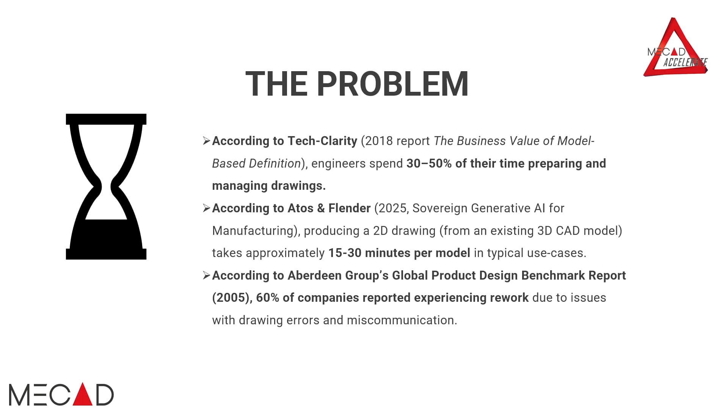Everyone spoke about drawings earlier. Someone referenced 50% of our time. Edith referenced 60% of our time spent on drawing creations. We actually went and did a little bit of study on this and found that 30 to 50% of our time is spent on drawing creations, with typically 15 to 30 minutes per model. That's a lot of time.

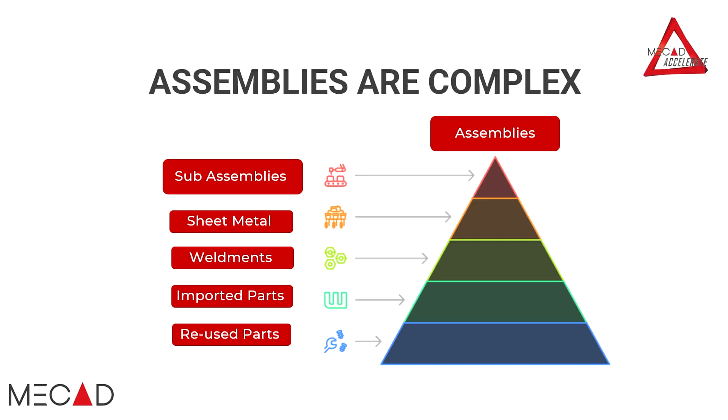And on top of that, 60% of that requires reworks because of miscommunication, of not giving through the information that is required by said drawings. Why is drawing so complicated? It's because of the complexity of assemblies. We have assemblies that have parts, sheet metal parts, weldments. It has imported items. It has item reuse. Certain parts in this subassembly are used here and there. When do I create that and what information do I put on the drawing? Very quickly it becomes complex in nature.

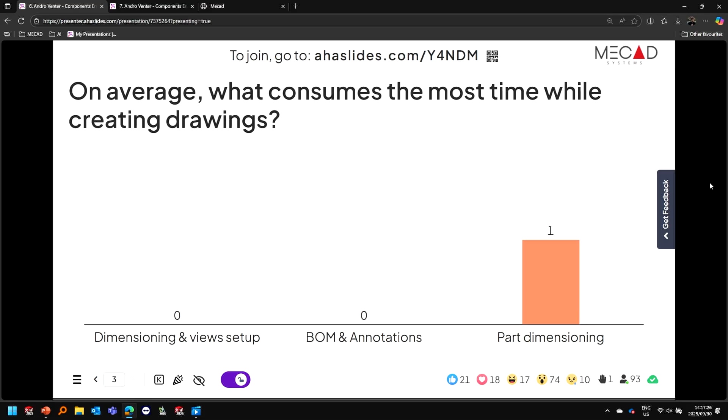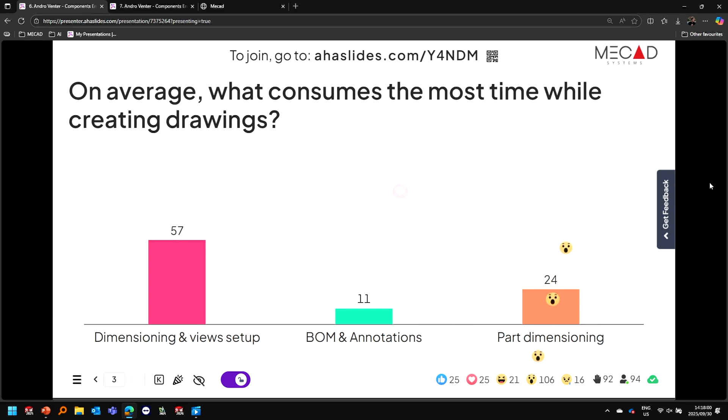Okay, so our next question. So what is taking the most of our time? This will be interesting because it's normally all three of them. This is very interesting information for me because I would guess that the 11 people are the ones that work with incredibly big assemblies that have the BOM information there. And who wants to be brave and say from those people, do they regularly look for that little bill of material balloon that is misplaced? That is typically where that goes into.

Typical sheet metal drawing. What does that involve? It involves your 4 standard views in bent format, and then additionally to that, your flat pattern information with your bend lines and your thickness that is related to that, with its bend annotations and its thickness.

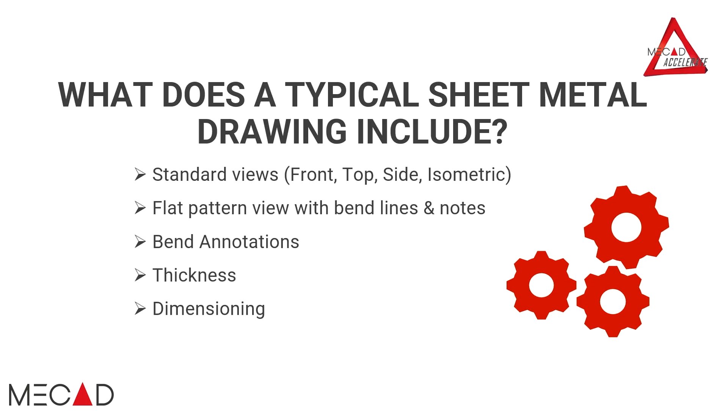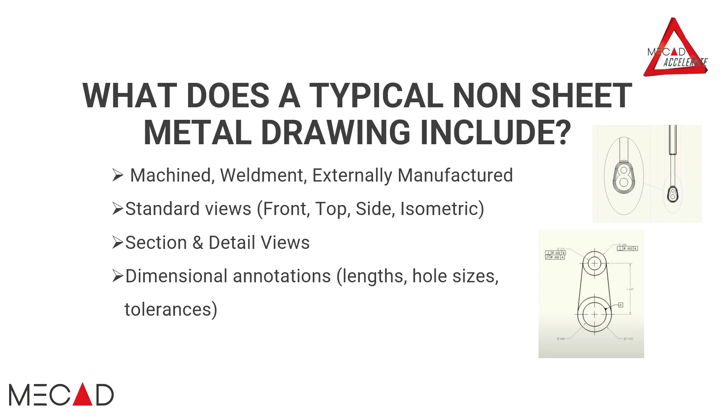Secondly, we have our non-sheet metal items that also have those same standard views with a front view, a top view, a side view, and an isometric view. But as we all know, it doesn't have a flat pattern because there's no flat pattern of non-sheet metal items. That is typically our weldments. It is imported parts. It is machined items in a subtractive fashion or an additive fashion, those that use those modeling practices. And finally, the annotations that we refer to.

So, what does a typical assembly drawing include? So, here we have again the same views. We have exploded views if they are applicable to us in whichever orientation it is that we're looking at. Bill of materials, I'll get back to that one shortly. And ballooning and annotation.

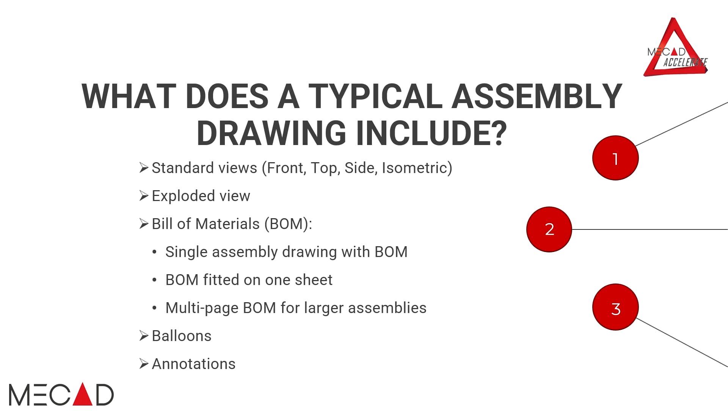We have 3 main bill of materials that we work with. So we have a very small assembly. That is one where all of the information can typically fit on one page. It is something with 5, 6, 7 components, and you just want to show that information. So that's category number 1. Category number 2 is the one where the bill of material becomes quite large, where it consumes the entire first page, and you start with your views on your second page.

And then on top of that, you can start with isometric views on your second page, and then thirdly, you can have your standard views on the next page. That's the second category. And then the third category is for extremely large assemblies, where your BOM can span 5-6 pages, and then only after that do you start with your views.

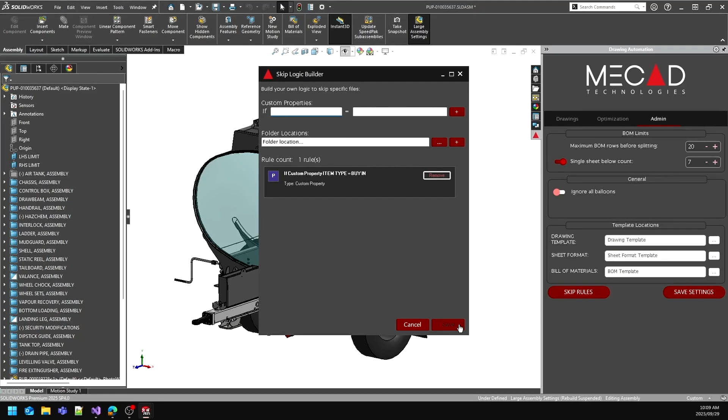The next one is the skip logic. So we spoke about the common items. It has skip logic on specific folders, as well as specific custom properties. So if you have a custom property called stock item for all your stock items that you don't want to generate drawings for, that is where this will be done, as well as specific folders where that folder is left out.

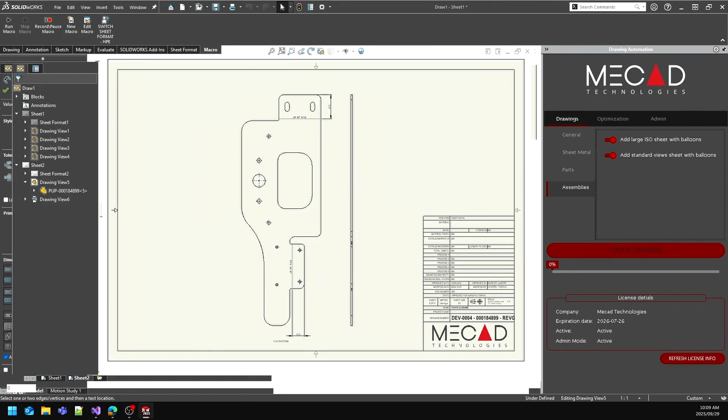Okay, next we're going to move into how it actually runs. So Wian can move over. It's going to say create. I'm going to give it a moment for everyone to just take in. So first it's going to start with sheet metal. After sheet metal, it will do weldments, auto scaling, fitting it to the sheet. If it has bend dimensions that are the same around a symmetrical axis, it actually puts in typical and removes all the unnecessary bending data.

Okay, so there we could see it runs through the weldment items. And by the way, this works with structural elements, as Edith previously said. Another question. Is a weldment profile and a structural element profile the same thing? First person to give me the correct answer. Yes. So for whoever has weldment profiles, the weldment profile is the same profile as you use in a structural element. We did some research on that to make sure that it is, and it works with the same APIs if you want to integrate that.

Okay, so next we're going to move on to our assemblies. I want you to pay attention to the right top hand corner just below the bill of materials. So we spoke about ballooning. What this does, it actually goes and calculates what balloons are not on this specific page that I have in front of me. So that is something that sits behind, or the views that I have on the page cannot typically pick that up.

We built in the intelligence that it goes, balloons everything on this page, then goes to the next page, then tries and balloons everything that it can find on view 1, then it goes to view 2, view 3, view 4, trying to get through all of the ballooning in that process. And in the end, it says to you, these 5 items I cannot get in the views that you have presented to me. Then, you know, section views, detail views, or hidden views, that is your next prerogative.

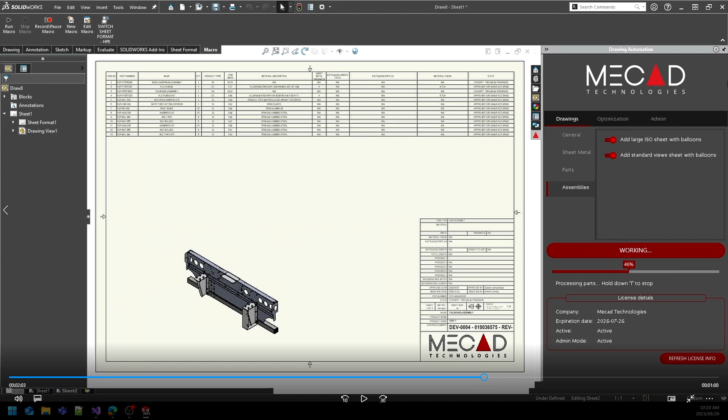Wian can start it for us. There you can see on the right top hand corner, all of those balloons aren't visible in here. There's a lot of parts, by the way, of this that's on the back hand side. If he runs it in the next views, you will see the balloons are in the next sheet. So there's a lot less balloons in the right top hand corner for the next views.

So the fortunate thing with this is it doesn't really require that you model in a specific way. But remember, as John Paulo said earlier, garbage in, garbage out. So if your model is extremely dirty, it's going to give that dirty information back to you. So the cleaner your model is, the better your modeling practices, just with the same modeling standard. It has no issue with using various ones.

So currently, we did not build in exploded views because that is specific to each company's unique needs. Some companies use a lot of exploded views. Can we build it in? Yes, and we can build it exactly how you want it to say, this is my exploded view position, I want it in isometric view, or I always want it in top view, or figure out in which view it is. We can do that. Currently, it's not built for that. So the question for everyone is, if you have multiple configurations, what happens? What happens?

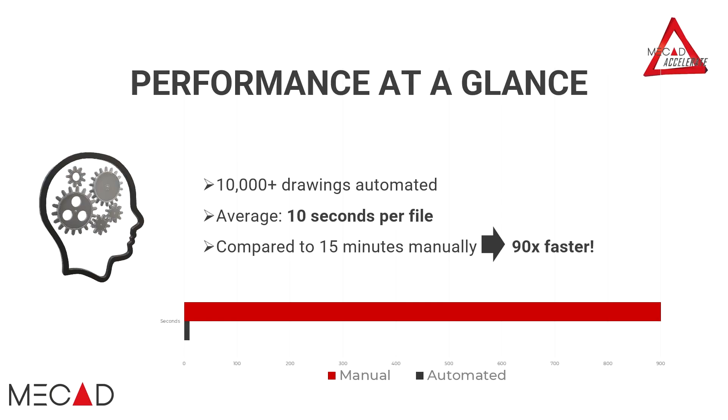We tested about 10,000 drawings, and we had an average processing time of 10 seconds. Large assemblies take longer, single parts quite a bit faster. That is 90 times faster than what a person can do it. Is it perfect? No, by no means. You still need a person to go through it. You still need someone to approve it for revisioning. So don't assume that the person who created the model created everything in there. Okay, go on to the next slide.

So, first of all, our engineers and designers can focus on innovation, as was mentioned earlier. 10 seconds per file relative to 15 minutes per file. We are preparing for artificial intelligence. We can help you with that. So this is one tool. I can tell you a lot about other things that we're working on as well, of data cleaning and preparing for that. But if you're not preparing for getting your information ready for AI, you need to hunker down. It's going to come for us. And in the end, all of this improves our productivity and our return on investment, letting you focus on what makes you money.

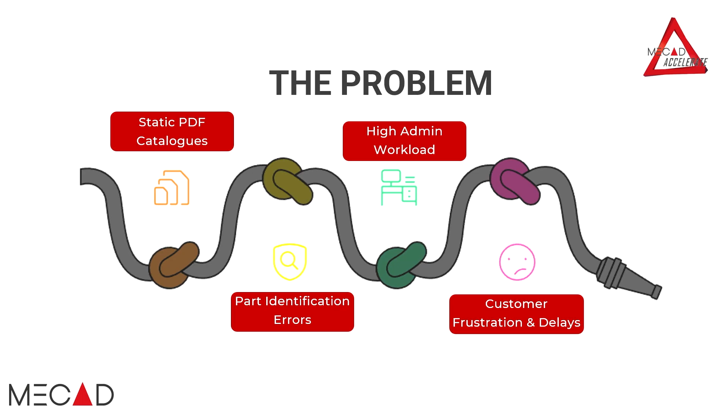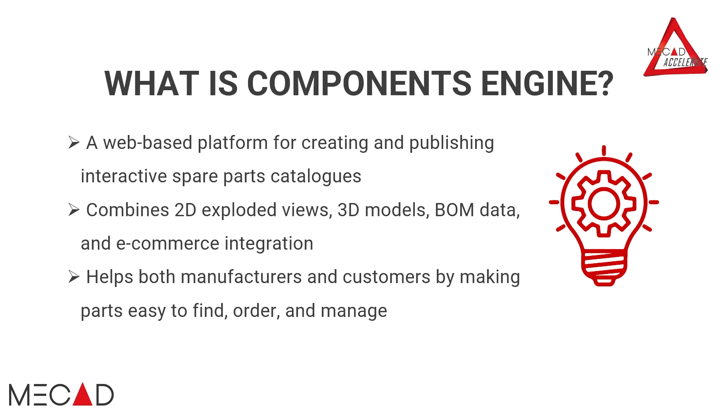So what is Components Engine? Components Engine in a nutshell is a 2D and 3D interactive parts catalog that allows your customers to interact with your models if you have models available. It has e-commerce in, and it shifts the burden of part identification from your team to your customer. That is the main thing that it does. So, it allows us to maximize our data flow and optimize our resources, because we don't have 30 salespeople answering phones trying to identify what files are required now and what revision is required, if you don't adhere to form, fit, and function engineering change rules. And all of this combined leads to increased after-sales turnover. That is what this does.

So it comprises 4 main components. IPC, that stands for Interactive Parts Catalog. That is the 2D and the 3D engine. The 2D engine basically takes PDFs, DXFs, and DWGs and creates an interactive vector-based graphic for you to interact with. The 3D side uses a STEP file as well as your bill of materials that needs to be connected to that. So STEP file and PDF, DXF, DWG. The Plus side is where your additional documentation is.

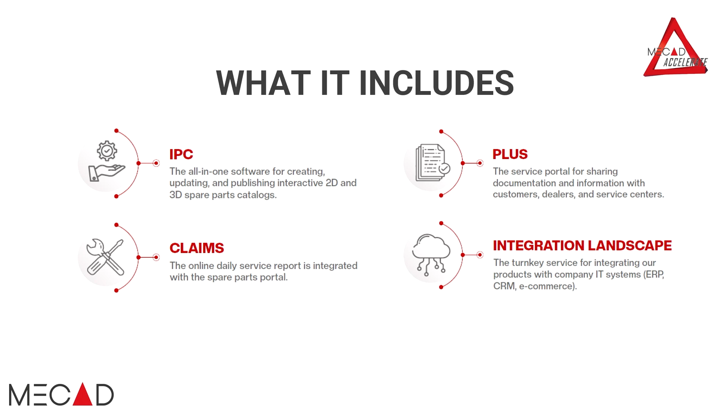By show of hands, how many people use Composer or write manuals that go with their products? The Plus portal is for that. That is where you upload all of your videos. Say you have a shock that you want replaced, and you have a video of someone actually replacing that. You can upload that information so it is available to that customer. Third is your claims section. That's pretty self-explanatory, where you have warranty claims and spare parts claims. And finally, the integration landscape. We spoke about ERP just now. This is fully integratable with any CRM or ERP system that you require integration with.

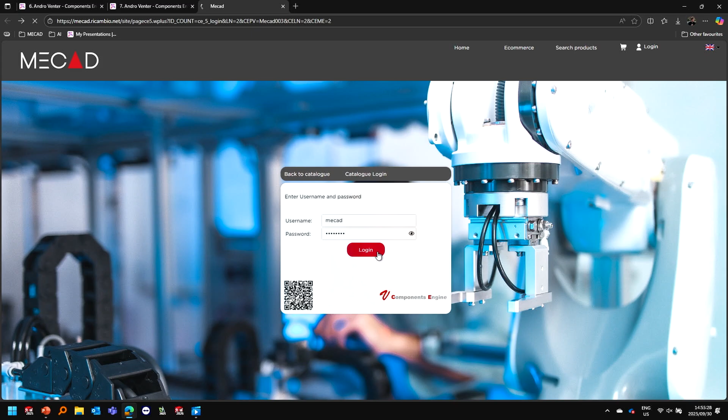So Wian is going to switch to Components Engine for us. Starting off with the login page. We just built this one for us. It has gated content. So you can either have it open, like Takealot, where you just need to log in with your details. Or you can have it specific for a customer that bought these 3 machines, and they can only see these 3 machines. The other customer that bought 5 different ones can only see those 5. So it's gated content with access control to whatever level you want. You can have both ends of the spectrum.

In here we have the 2D and 3D environment that we just spoke about. Wian is going to go to the 2D environment and show us. We have loaded 3 products there from previous What's News. So Wian, if you can open the first one for us. There you can see once he hovers over a balloon, it interacts at the bottom and can be added to the cart. So Wian, if you can select one and add it to our cart. It is intelligent enough to remember what is already added, and all of those properties you see on the left-hand side can be customized for you. We just selected random ones, but you can have part name, number, etc. So that is that. We're going to go into the second one.

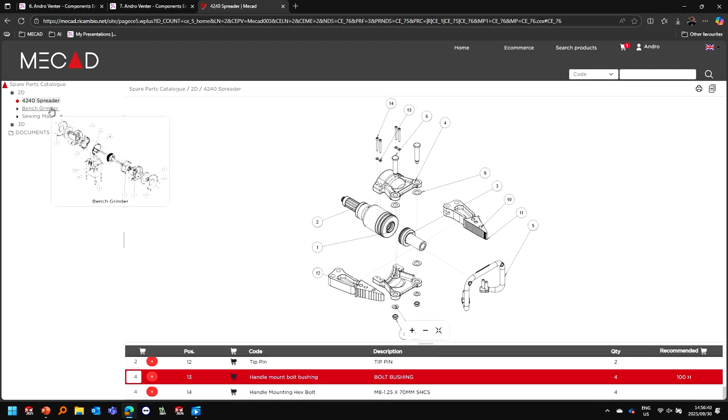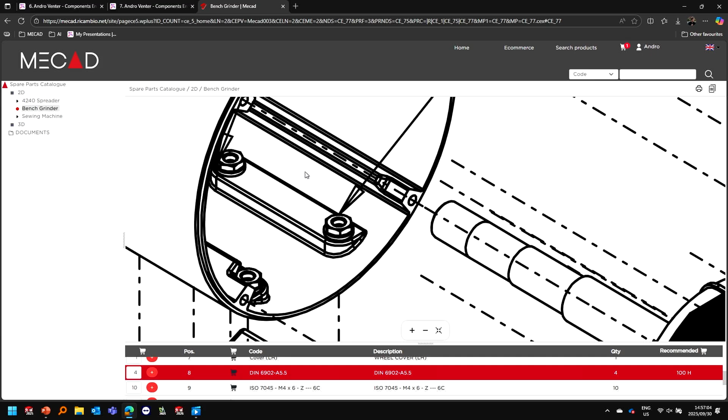And there we can do the same, just to show that. And Wian, if you can just zoom in for us to show that it is a vector graphic, that the quality doesn't distort if you zoom in. So that information is there as well, with navigation going left and right. The 2D environment kind of looks like a very fancy drawing. The 3D one is where the magic starts.

So moving over to the 3D side, we have 2 there. So those of you that's been a customer of MECAD long enough can remember the gripper assembly. That was also one that was demoed, and we have our shredder. This loads that entire assembly. It is graphical information. It is not the model itself. So there you have that model. You have the model in there.

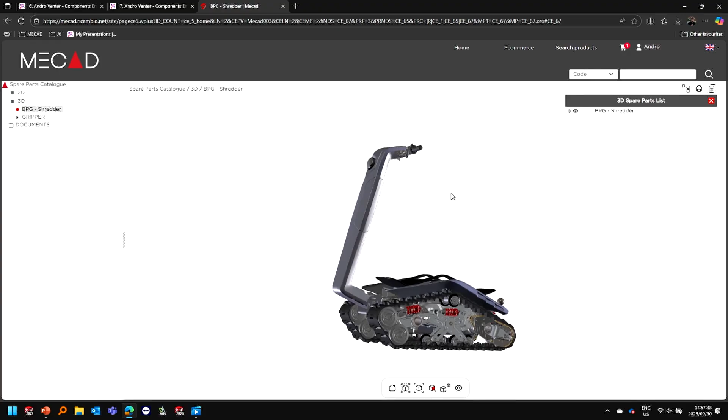It's fully interactive. You can move the seat. You can remove items from there. But your customer does not have your IP. They don't sit with your actual file. So that's a graphical representation, even though it doesn't look like it. They can't get any of the information from there.

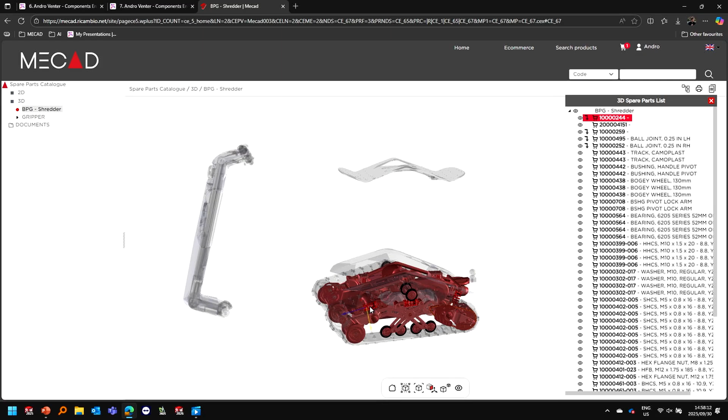They can't measure. So for now, Wian is going to drill down for us on that shock, that little red one there. So say our customer wants to order that. You can see there, you drill down into the various assemblies until you get to the one that you want, while being able to rotate it still, even in this configuration.

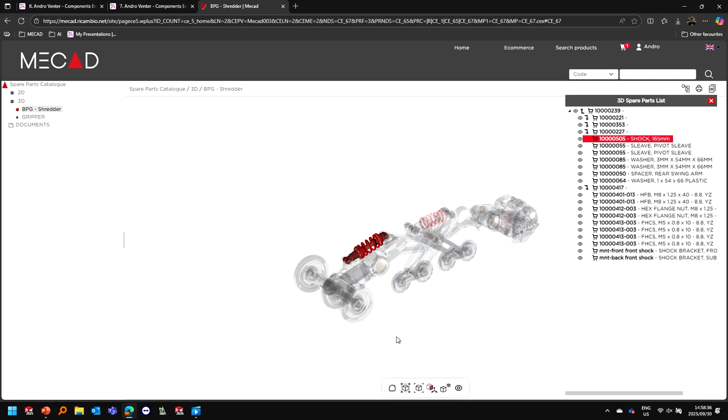Someone asked about exploded views. There is functionality in this that can automate explosions, but then it is automated. It explodes everywhere. It doesn't give you the neat lines. So Wian's going to add that to us now. And we set this up so that all 6 shocks must be ordered at the same time.

So you can have rules built in to say, at 100 hours, I need to replace this. At 200 hours, I need to replace this. All of that intelligence can be built in here. And there's a whole data analytics section for what customers ordered what parts, when, how many times was this part ordered by those customers. All of that information is in here.

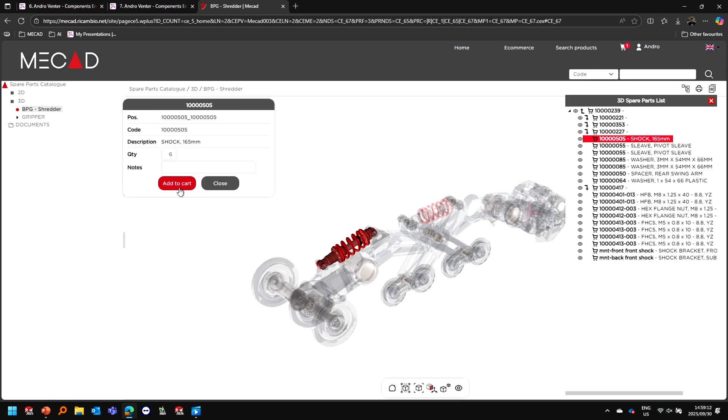I'm going to move over to the Plus portal, which is the documentation setting, just showing you where a PDF and a file is typically uploaded. Wian is going to just show us the PDF side first. Sorry, Wian. Sorry. Oh, let's just move. Oh, there it is fast now.

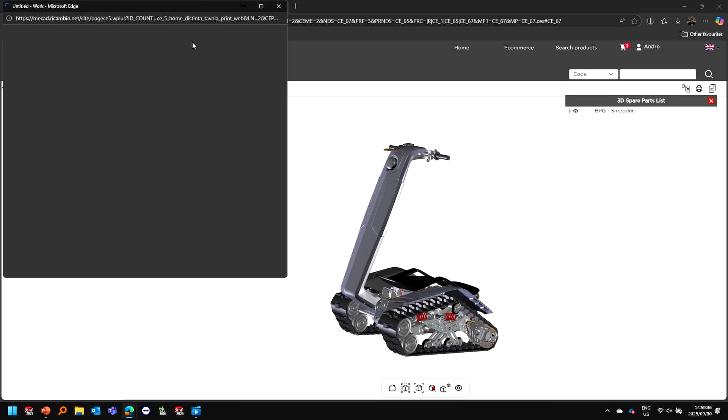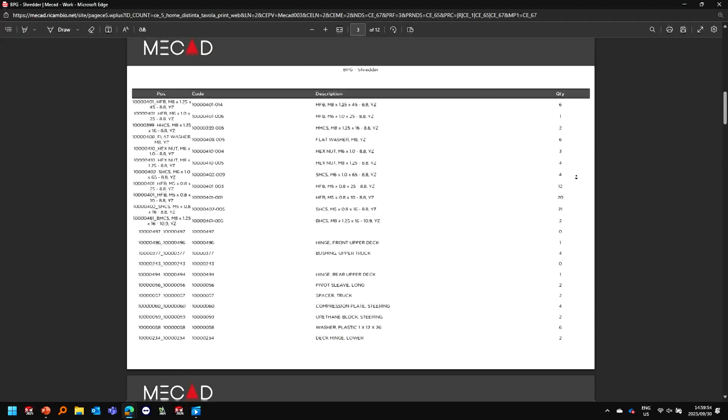So if you are, like Niels, sitting in the middle of nowhere and you want to actually have a PDF version of this, it can build various sub-assemblies. We just set it so that the main assembly is displayed and then all of the bill of materials is underneath that. So here you can see a PDF and a YouTube video that we just linked to this just to showcase it. It has full search functionalities, those that use PDM. It has the quick search functionality as well as detailed search functionality.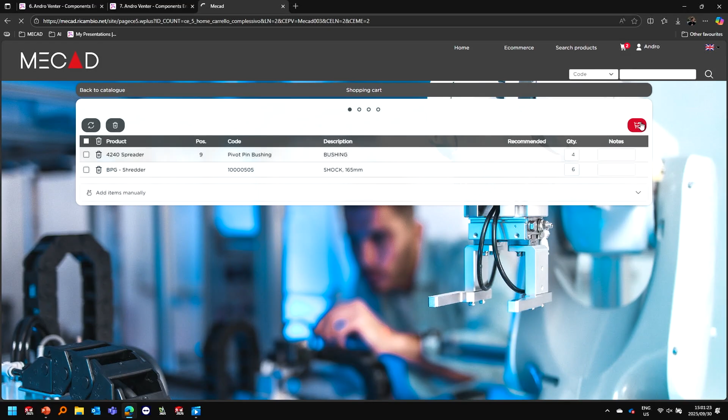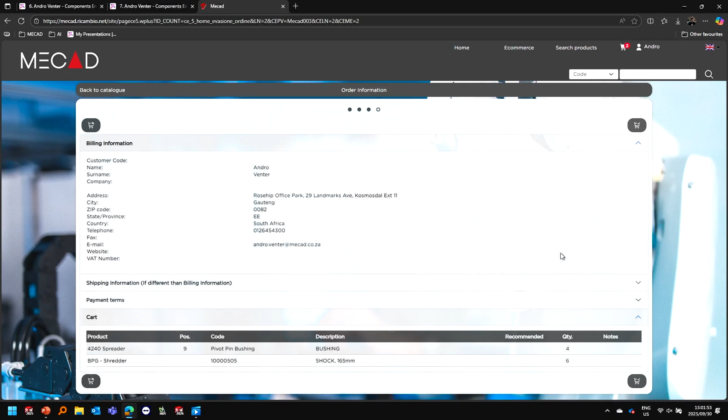There are 2 main options with everything in between. You can just go through the motion while I talk. Upon ordering, it can either send yourself and your customer an email, just basically paper confirmation that the order was placed. Or if you want to go as far, you can integrate this with your ERP so that it actually opens a work order for you on your ERP system if that customer has the correct access control and rights that you want to be assigned. So there, Wian has assigned that to me, and if he checks that out, it places the order with us.